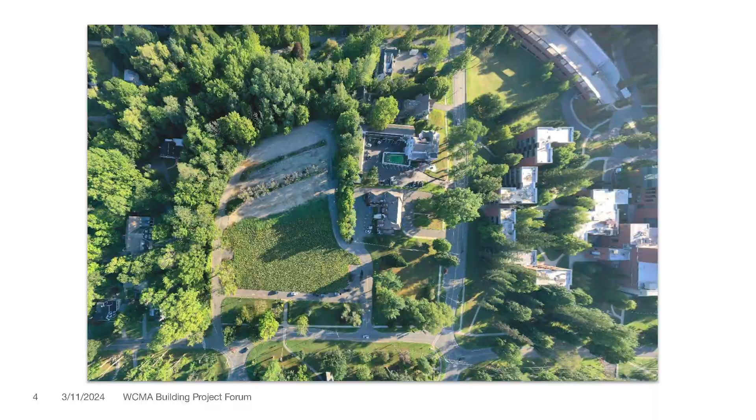Speaking of the site, many of you probably know the museum will be at the corner of Route 7 and 2, where the former Williams Inn was. I wanted to talk about the location because I'm very excited about the greater accessibility and visibility of this site for a lot of reasons, but also because it's going to really amplify what's possible for community programming.

We're very excited about the possibility of showing more of the collection. We also want to bring back K-12 programming and family programming in a more robust way than we've been able to in recent years at our current site. That's just a taste of what we think this new building is going to make possible for the broader community.

On an academic front, it's absolutely essential to meet our current needs plus grow into our future needs. But for all of us, it's going to be such an incredible resource and a great place to come together and be proud of both the liberal arts possibilities of learning with art and being stewards of this great collection, and also the specificity of WCMA's collection, which spans history and spans the globe—the possibilities for this region are endless.

That's what I wanted to highlight as we move into design, because this is a program-driven building. If there was ever a program-driven building, it's all about the possibilities that art brings to life, human connection, and ongoing learning in every way. I'm glad you're all here and as excited about this idea as I am. Thank you for being here, and please ask questions of all the folks in the room who stood up, because we've all been deeply involved with this.

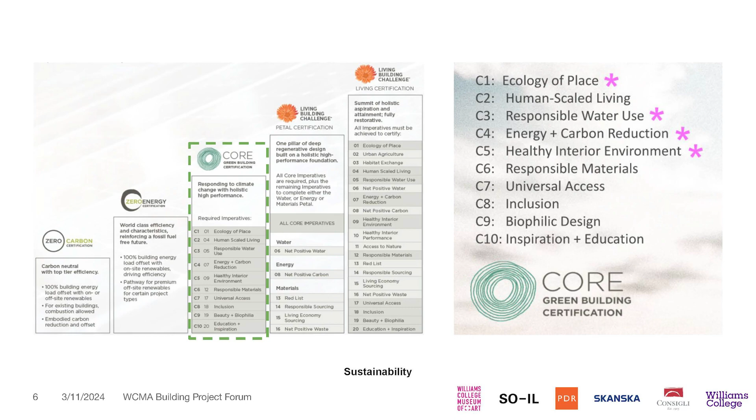What you see here, and it's okay if you can't read the slide, outlines the sustainable agenda for the project. Williams College is really at the forefront of sustainable, forward-thinking design, both for their buildings and for the larger campus. One of the policies they've adopted more broadly as a campus is ILFI's LBC program. ILFI stands for International Living Future Institute, and LBC is Living Building Challenge. The LBC 4 Core—sorry about the wordy language—is basically the program you see in front of you.

There are 10 imperatives that look at sustainability holistically across a whole range of issues: the environment, ecosystem, water management, plantings, materials that go into the building, embodied carbon, life cycle analysis. All of these are part of the design process, and actually quite aggressive in terms of what we're trying to achieve to make this building sustainable for 50 to 100 years. This building's going to be here for a long time, so that's the hope.

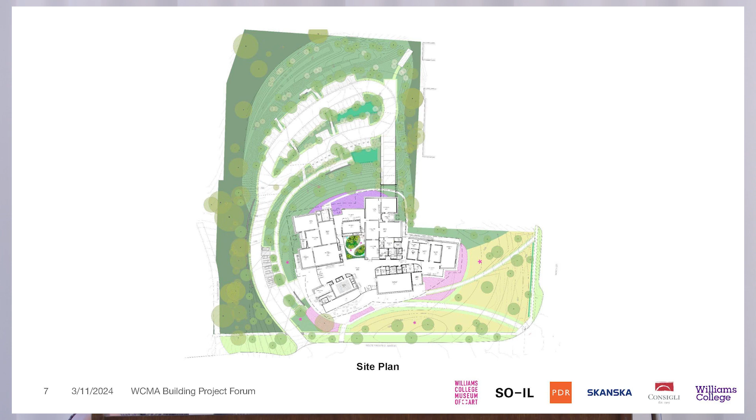I think that hits the high points. You cert— I think at the end. Yeah, let's just get— I think it makes more sense to do it at the end. Okay. Yeah, so I think we'll do the questions at the end.

To follow up on Ryan's presentation, I'll get a bit more into the building. I'm Jonathan Malloy with SO-IL, the design architect. We've been working closely with Perry Dean, our partner architect, and I'm one person in front of a very large group of design professionals who assembled to bring this project to life, and all of those people deserve a lot of credit. We have a project team with almost 20 different groups, specialties ranging from sustainability to mechanical engineering, structural engineering, all the way to specific partnerships with manufacturers and trade partners for complex parts of the project, like the superstructure. I'm privileged to share the design with you today.

Ryan gave you a basic outline of how the building is sited, and Pam brought this up at the beginning: it's been important for us from the start of this project that the building be derived not only from the region and history of the site, but also the climate itself. We looked and spent quite a lot of time here in this area, and we have roots here as well, such that the building and the landscape can actually be in conversation with one another and not dissociated.

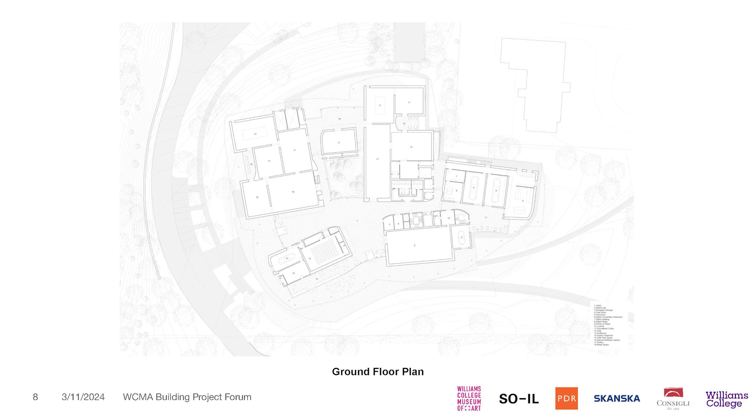Up to the northeast wing is the study center, a significantly expanded infrastructure for classrooms. There are two large art study classrooms, a digital humanities classroom, and a works on paper study center, all tied with much more efficient logistic relationships to a significantly expanded art prep and storage space at the lower level, and workspaces at the upper level.

There are ways for art to move much more efficiently between the different spaces, which in a museum like WCMA is very important, so that as many objects as possible are available to the teaching staff. That gives you a sense of how the program relates, and now I'll talk you through how that actually manifests into space.

One of the starting points in thinking through the architectural concept, beyond finding the right spaces and program relationships, is how this building can be about bringing people together and creating spaces that are inviting, welcoming, and fluid.

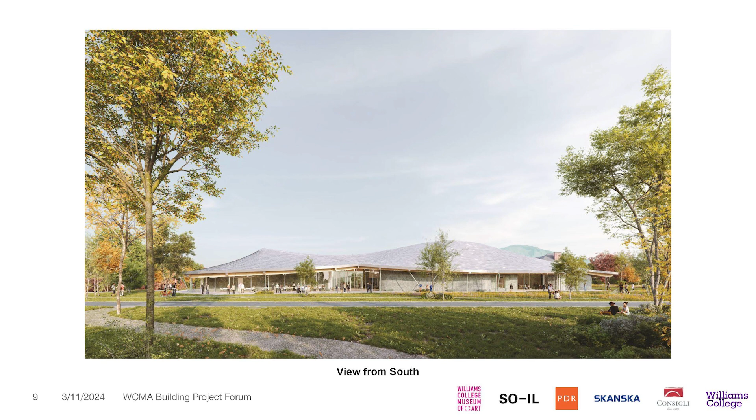Oftentimes museums are really made up of walls. Walls are important for the ability to display things, but they also have difficulty in terms of separating spaces and holding people at bay. A priority of the museum from the start has been that this not feel like a place you're only welcome if you know a lot about art history, but that everyone would be welcome here.

In a certain way, we tried to move beyond walls and find a different architectural language for a building that could be about feeling together. In that way, we actually landed on a roof rather than walls.

The organizing feature of the building is a large overhanging roof that is, in certain ways, derived from some of the vernacular traditions of the region, like overhanging porches and interesting flowing shingled roofs.

We've been evolving that roof line to also be in conversation with the surrounding topography and the climate, so the different overhang depths are calibrated for their orientations toward the sun. We've focused a lot on the specific materials of the roof to calibrate both lightness and a feeling of dynamism, while also capturing a spirit of togetherness.

Just to point out a few specifics in this image, imagine standing in Field Park looking north toward the building — this is the primary frontage of the museum. On the left side you see a glazed wall, which is the front of the cafe. To the right, where you see a solid wall, that's actually the object lab, the main volume.

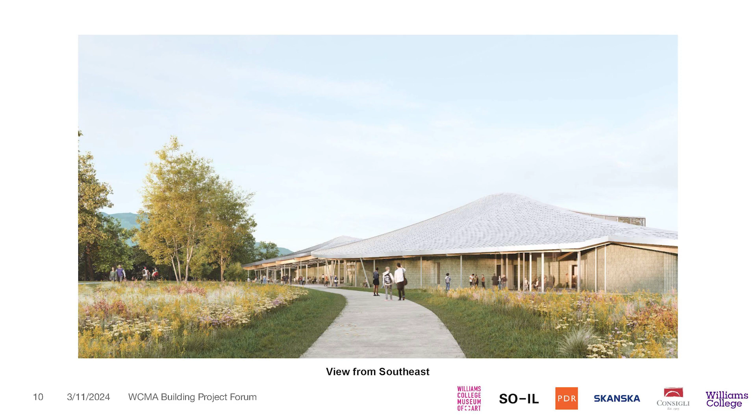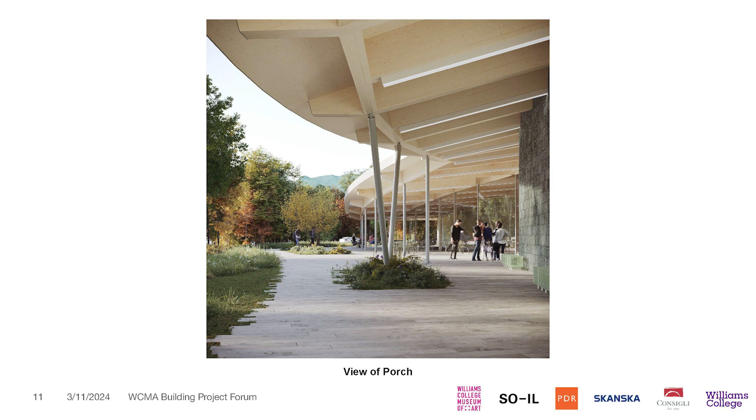Here is a view from beneath that porch — this sort of in-between space, perhaps rooted in the many porches of the Northeast, but taken to a much larger scale, more like a stoa or an arcade. It allows a space between being outside the building and inside it: a place to linger, to gather, to meet people, and to feel like you're able to approach.

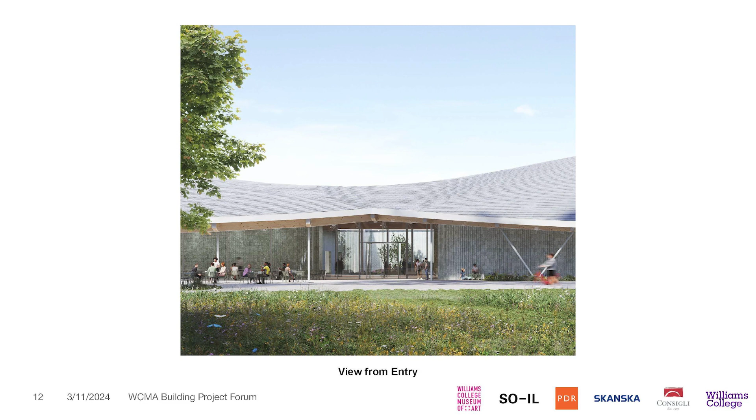This is a view looking directly in. Something I didn't mention in the plan, but that's really central to the building, is a central courtyard, which was important to us to bring light into a deep footprint of an expansive building, and also to have nature at the center of the building so there's an opportunity to engage with plant life and weather while occupying the building. The other benefit is the ability to see natural light deep into the building as you enter, which will be an opportunity for art in natural light at the center of the museum, something very exciting from a curatorial standpoint.

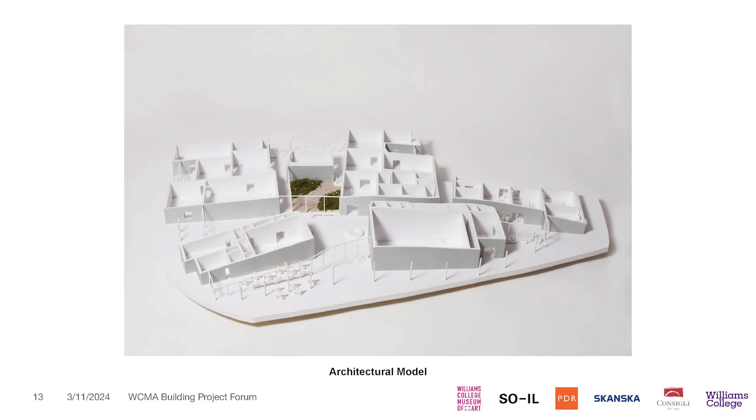Here, just to give you a sense of how the material logic of the building works: this is an architectural model without a roof, showing how these independent volumes are clad with a greenish masonry that wraps from exterior to interior. The structure of the roof and the finish of the floor pass from outside to inside, so the centralized lobby feels like a place of gathering, as if it's the intersection of four passageways, with views to the outside but also materials of the outside coming in.

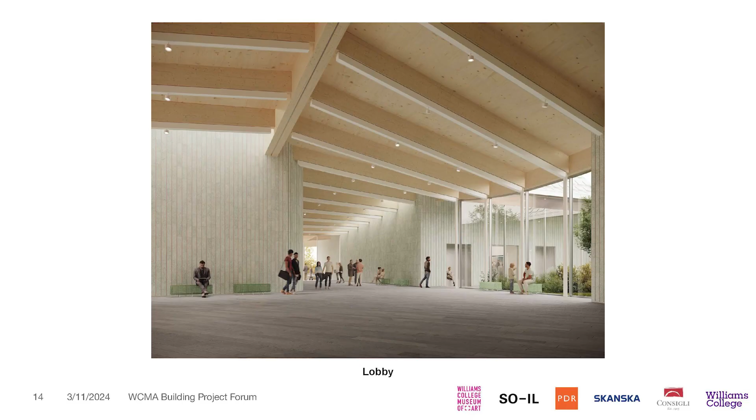This is a view in the lobby. You could imagine standing in the center of the lobby. This is the courtyard to the right. What you're seeing above is actually one of the architectural outcomes of our sustainability ambitions.

This is known as a mass timber superstructure—a wood structure, but not wood in the way timber used to be done, or is still done in large barns in the region, where making very large spans and members required cutting down very old, large trees. These are engineered timber products, made from much smaller wood elements laminated together to create wood that can perform at a similar level to steel and concrete. By being sourced from sustainable forests, they're actually able, in certain cases, to sequester carbon rather than extract it.

What we're doing here is also finding ways to push the boundaries of that technology. You're seeing a twisting motion happening in the ceiling, which helps create the roof form above. This is one of the cases where we're collaborating with a manufacturer in North America, working through the details as we speak.

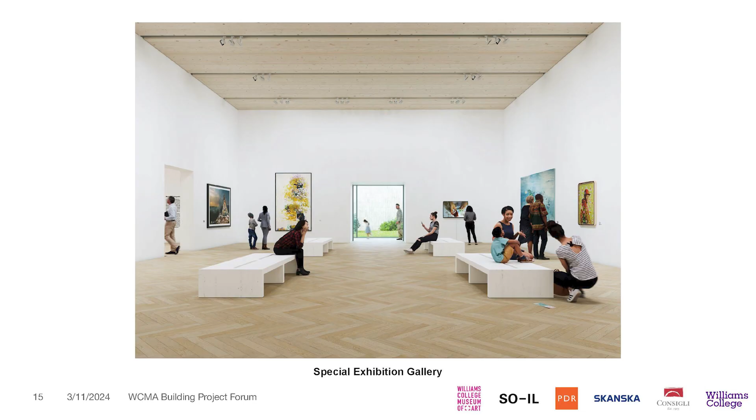This is one of the galleries—actually the special exhibition gallery—where the wood material of the ceiling manifests in the galleries as well. You're also seeing an opportunity, part of the gallery sequence, where there are relationships to the outside through views through the building. Here you're seeing through a corridor into the courtyard from the special exhibition space. It was really important to us to find ways for these spaces not to feel anonymous, not like a true white box that could be anywhere, but spaces that are of Williamstown, of the Berkshires, so you know exactly where you are just by being in the space.

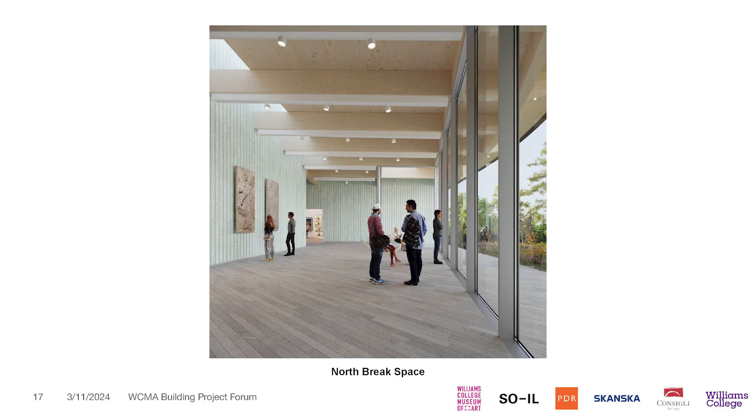Between galleries, we have what we're calling break spaces—someone on the museum team described them beautifully as commas in a sentence, where you have a moment to pause and breathe, with a more expansive relationship to the exterior since they're less concerned about light sensitivity for works of art. This is one of those moments, facing north, an exciting view looking out onto what will ultimately be a restored version of the site, and also an opportunity for museum collection pieces well suited for this—in this case, the Assyrian reliefs that are so important to the collection.

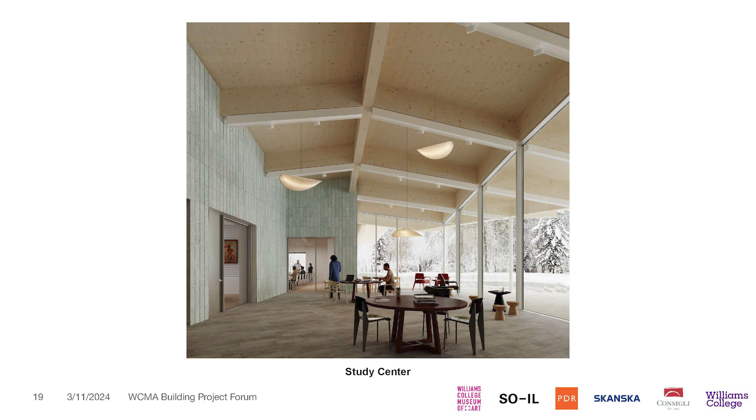And then this is a look at the study center. So this is the sort of student hub of the building, but also gives us a sense of the seasonality of the building and its relationship to the outside. And perhaps on a day like yesterday, the building is really a beacon of warmth and interiority that can speak to the specific regional context of where we are.

So I will leave it there.

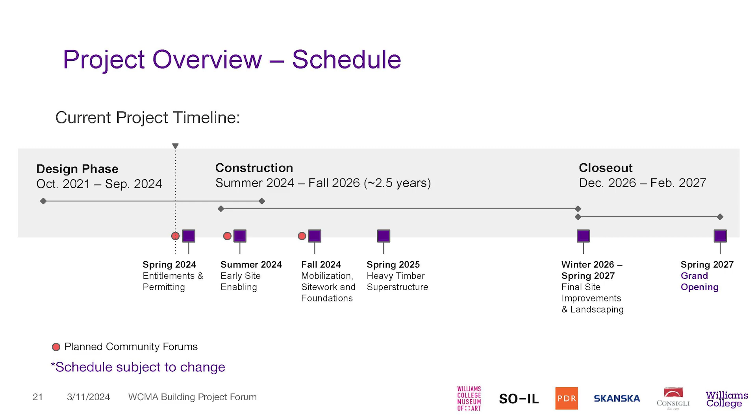We're projecting substantial completion in the winter of, really probably the winter of 27 now, end of 26, early 2027, followed by closeout, the big move migrating from the old museum to this new building, furniture installations, et cetera, and then grand opening in the spring of 2027.

You'll see a few red dots on the timeline too, so we do have a few planned community forums. One will be an abutters forum in the summer, and then another construction kickoff forum in the fall.

So I think you've heard it throughout the presentation, this project is taking a very collaborative approach. We have many stakeholders from the college, many committees, but also the community, the town, and we want to hold these quarterly forums to get your input, hear your questions, your concerns, and hopefully address them head on. We don't want there to be any surprises throughout construction.

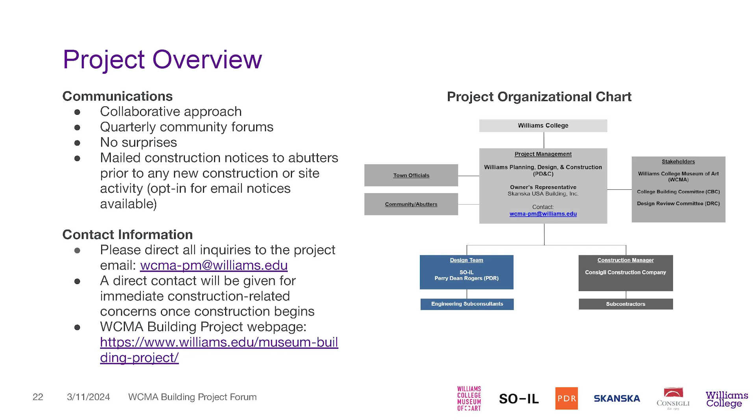Whenever there's new construction activity or site activity, we will send out notices, and you can always opt in for email notifications by emailing our project email address, which is provided here.

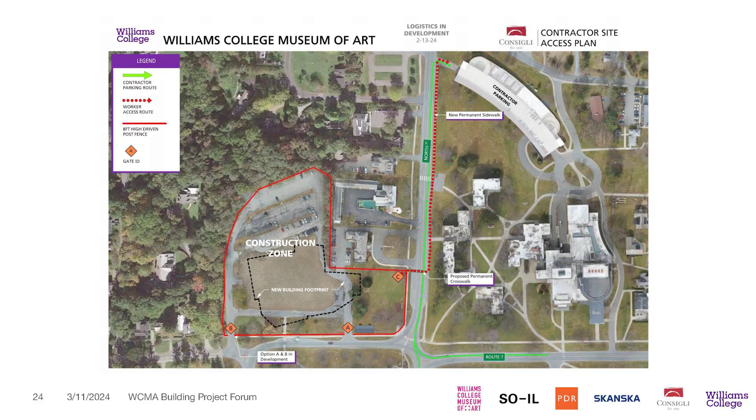The other item we've been discussing with the town is at Gate C, where the construction workers will be entering. The college has presented to the town about adding a crosswalk there and extending the sidewalk currently on the east side of North Street, extending it down, so that would be part of the design as well.

We also heard concerns about Gate B and the bus stops, regarding students traversing from west to east. So the college has engaged the design team in doing a traffic study, looking at the best locations to relocate the bus stops in advance of us starting on site, and also improvements at that corridor.

Backing up a little bit, what can you expect to see? What can you expect to hear? Right after the 4th of July, we're on site. We're setting up a site fence, and there'll be a scrim along the entire perimeter to make sure we contain everything within the construction limits.

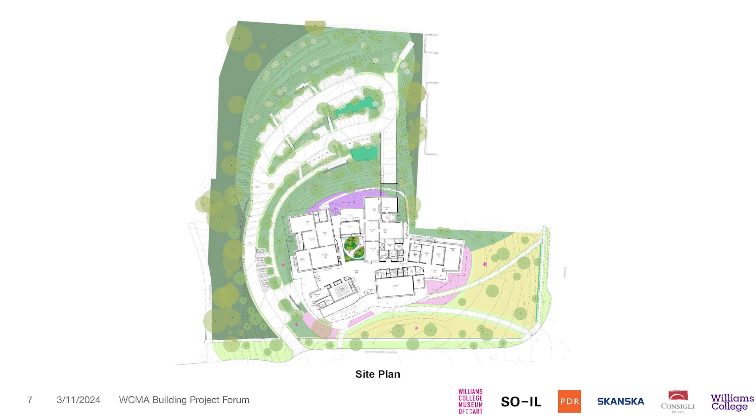But I think Reed Hildebrand and our other consultants are really at the forefront of this kind of thinking, and so we're very excited with the direction this is going along those lines. Maybe I can skip.

Hi, my name is Jim Fowler, and the plans look great. I had three questions. One is, could you talk about the HVAC system and how that relates to your sustainability goals? Second is on construction logistics - what do you envision in terms of heavy truck travel to and from the site, and what are you doing to mitigate that in terms of designated routes, hours, dust control, and noise control?

And third, I was intrigued by your comment that you may be introducing trees on site, and I'm wondering if you've given thought to buying those and growing them off-site, so when you move them on-site, there's a more mature landscape instead of saplings.

Absolutely, thank you for the question. I'll answer two of those, and then Sean can take the construction logistics.

For the mechanical systems, as part of the project we are targeting a specific EUI number. EUI means energy use intensity, and it's a little bit like the gas mileage of a building. It's become a very important number because it reflects how much energy a given building consumes per square foot per year. As part of the project in the ILFI, we have a target that is 70% below the baseline of a building of this typology. We benchmarked other museums, and we're 70% below that.

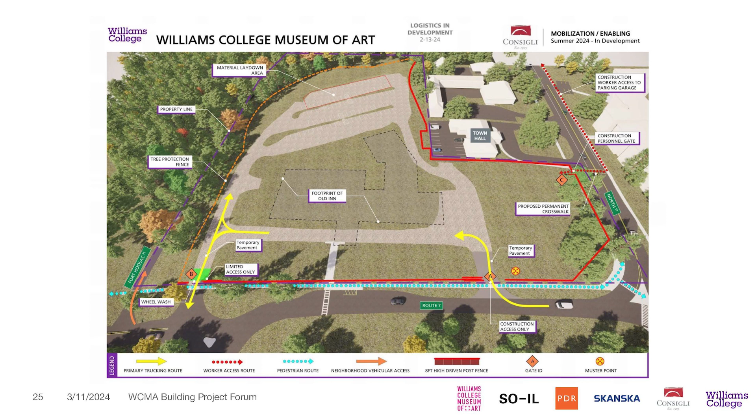In terms of routing, there's only a couple of different routes you can actually take to get to the site, but again, it has to do with communication. There will be periods with several trucks, but you'll be notified. When we have concrete pours, there will be a significant amount of trucks, but it's not like every day you're going to have 100 trucks coming to the job site. It is inevitable, unfortunately.

Getting the excavation done, getting the concrete pours, the mass timber - as time goes on, the frequency of the larger trucks will be a lot less. We're trying to get a lot of that work, the concrete work, done in the winter months.

The nice thing about mass timber is it's not a loud activity. So those trucks will be able to come in and queue up on the back of the site. We won't have any trucks queuing up on Route 7.

Did I answer your question? Pretty much. Pretty much? Okay.